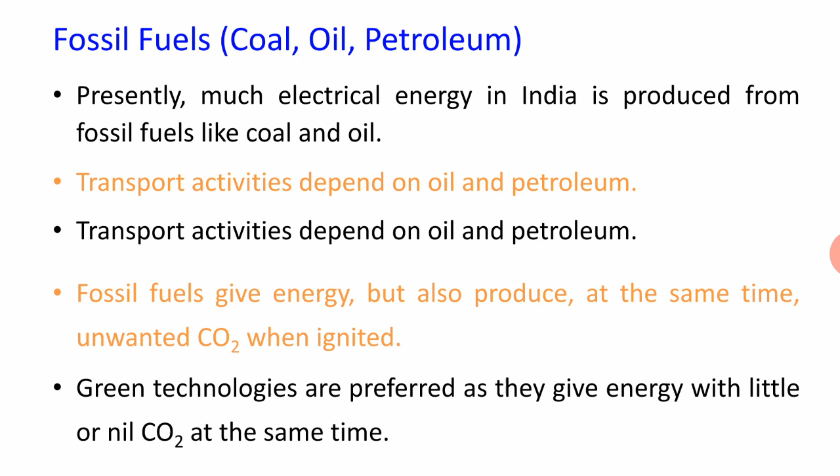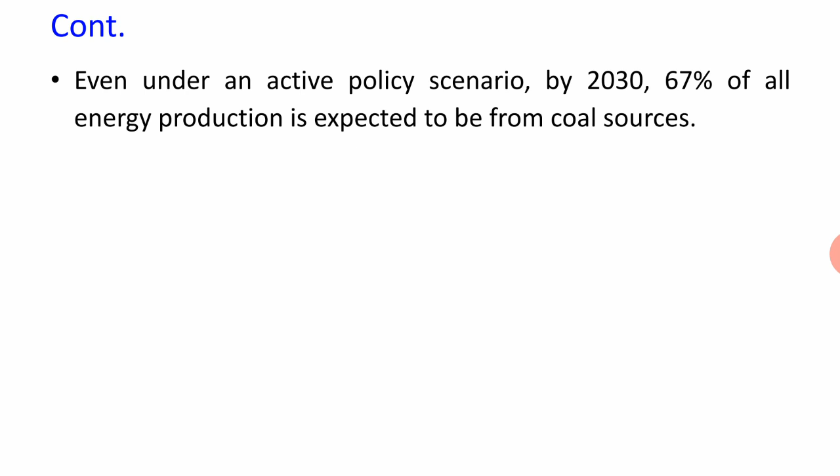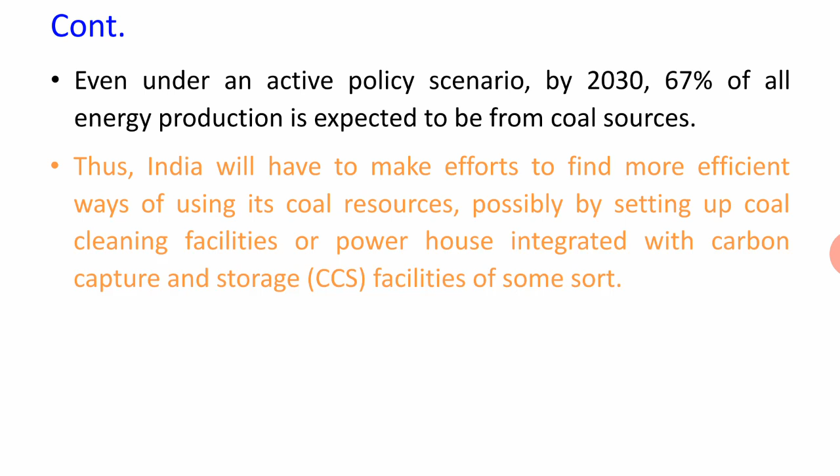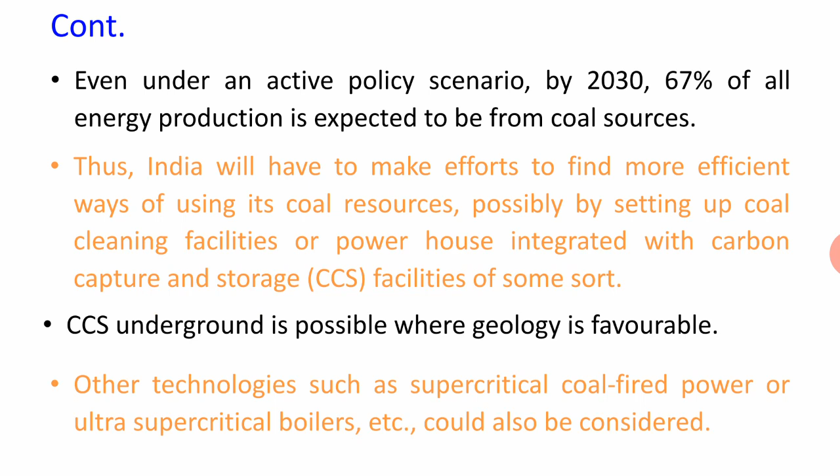In the active policy scenario for 2030, 67% of all energy production is expected to be from coal sources. India will have to make efforts to find more efficient ways of using its coal resources, possibly by setting up coal cleaning facilities and powerhouses integrated with carbon capture and storage facilities. In this CCS approach, carbon capture and storage underground is possible when the geology is favorable. Scientists and researchers are working on how to dispose of these carbon emissions.

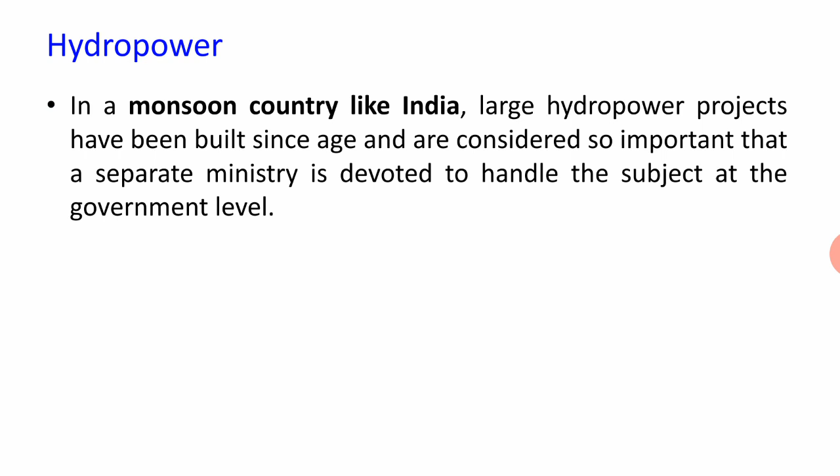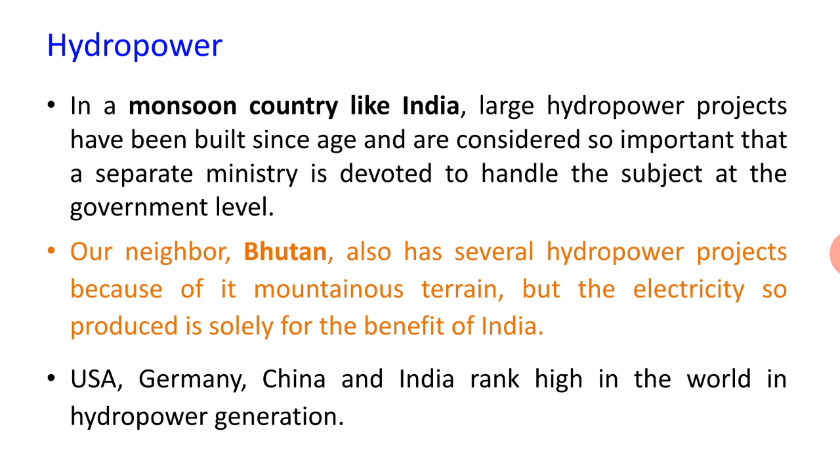The second source is hydropower. This has also been cultivated since long ago. Being a monsoon country, India has large reservoirs and constructed dams. The potential energy of water is converted into kinetic energy using water turbines. Bhutan also has several hydropower projects because of its mountain terrain, but the electricity produced is solely for the benefit of India. India has constructed a lot of dams that we use for our purposes. The USA, Germany, China and India rank high in world hydropower generation.

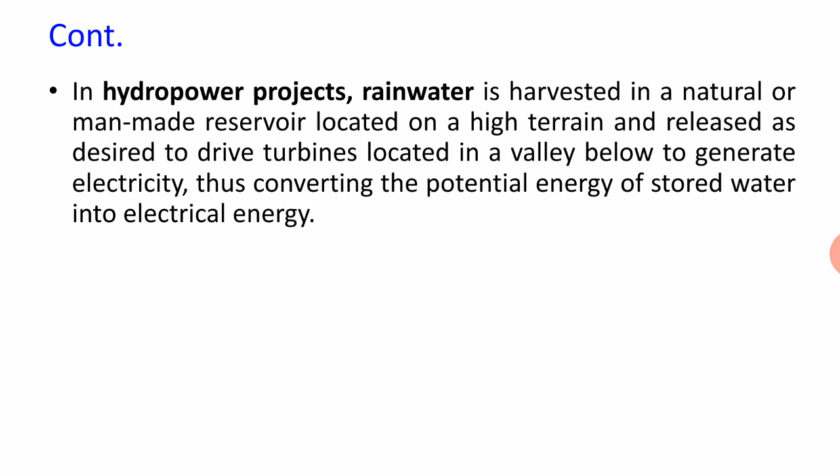In hydropower projects, rainwater is harvested using man-made reservoirs provided at the terrain of these hills. Turbines are located there, and this is how electricity is generated. After use, the water is released downstream to become a source of fresh water for irrigation, water supply to towns, and downstream needs. There are no side effects; hydropower plants produce almost zero carbon emissions. The water has two roles to play: generating power and meeting irrigation and water supply needs.

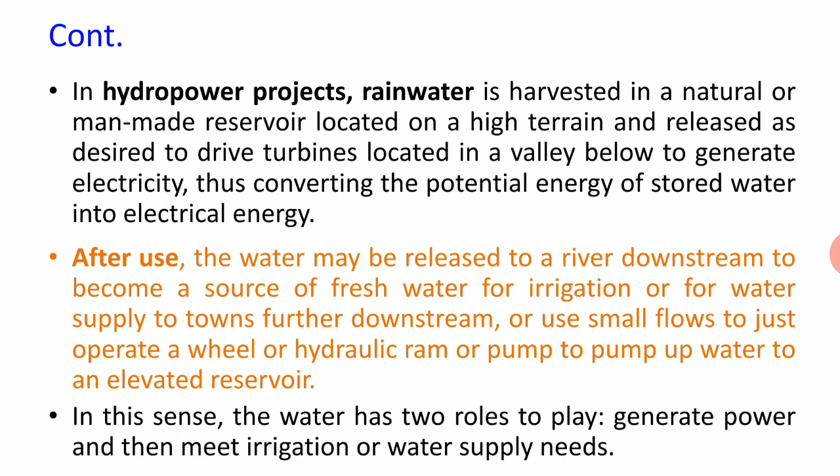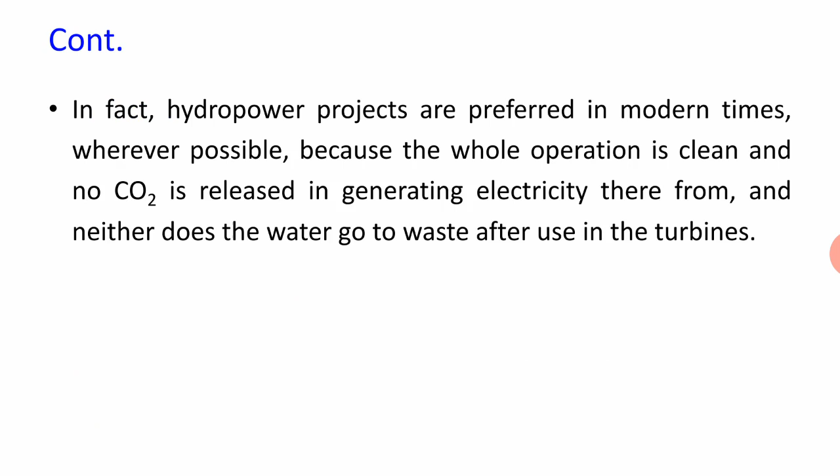So in fact we have zero emissions of carbon dioxide from this kind of hydraulic power plant. However, these are not possible in flat terrains; they are only possible where there are mountains, and this is one of the drawbacks that exists.

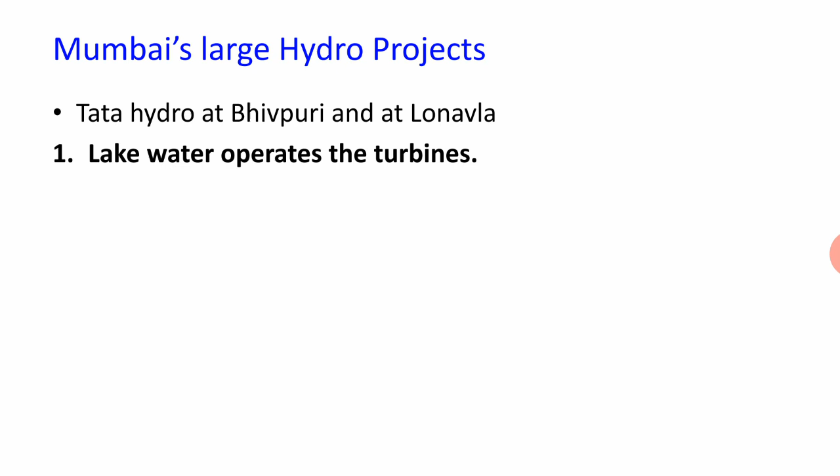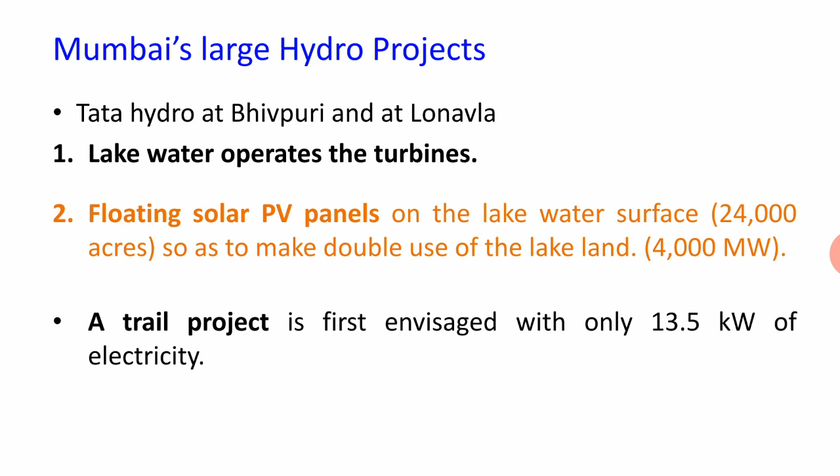In Mumbai, large hydro projects were built, such as Tata Hydro at Bhivpuri and at Lonavla. They constructed a lake where water operates the turbine. At the same time, floating solar PV panels are placed on the lake water surface. These floating solar cells are made across the lake, around 24,000 acres, generating 4,000 megawatts. A trial project was first envisaged with only 13.5 kilowatts of electricity.

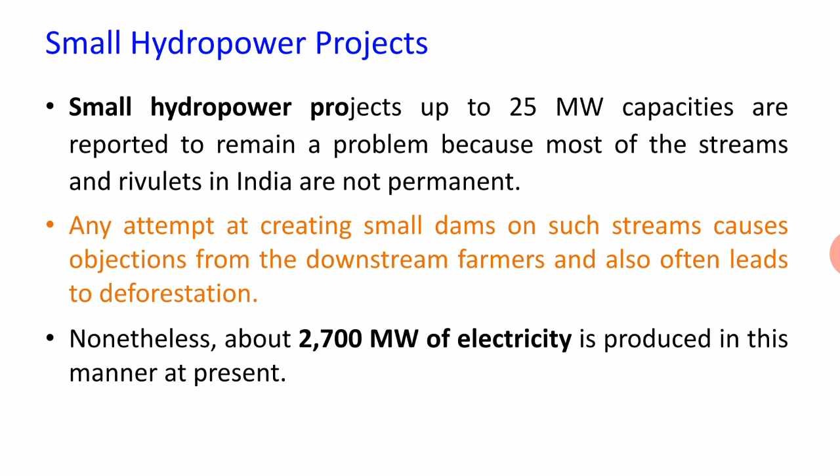Small hydropower projects are also being planned, with 25 megawatt capacities. These are reported to remain a problem because most streams and rivulets in India are not permanent; they depend on the rainy season. Attempting to create small dams on such streams causes objections from downstream farmers, and land deforestation also takes place. Nonetheless, around 2,700 megawatts of electricity is produced at present through a combination of small hydropower plants and PV cell attachments.

What is the main outcome from this? We have seen the fossil fuels, the existing energy resources in India such as coal and oil power plants and petroleum power plants, and hydropower in Mumbai. The large hydro projects, floating solar panels, and small hydro projects all have certain constraints, but at the same time they have their own advantages. Through further research, they can be made more available to the public.